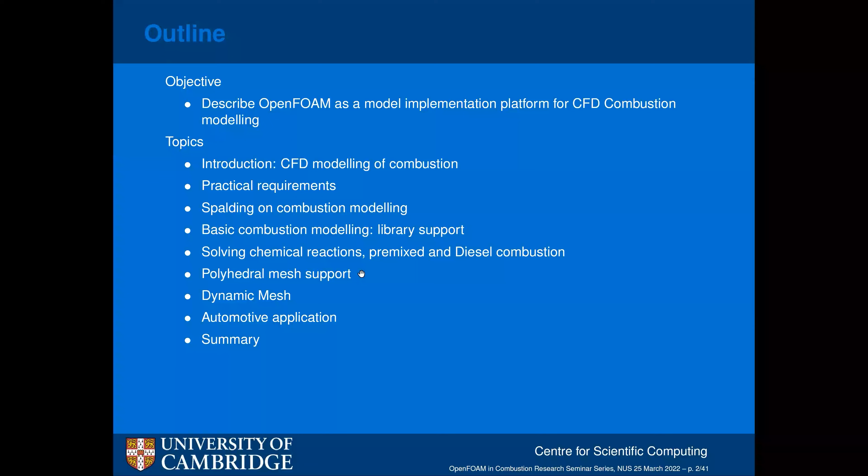We are solving continuum modeling equations. We are solving for concentration, conservation of mass, momentum, energy, and various additional phenomena. Going through this story, we will come about two-thirds of the way down, which again brings us back to the beginning, okay? But I'll keep that twist for a couple of minutes and dive straight into the story.

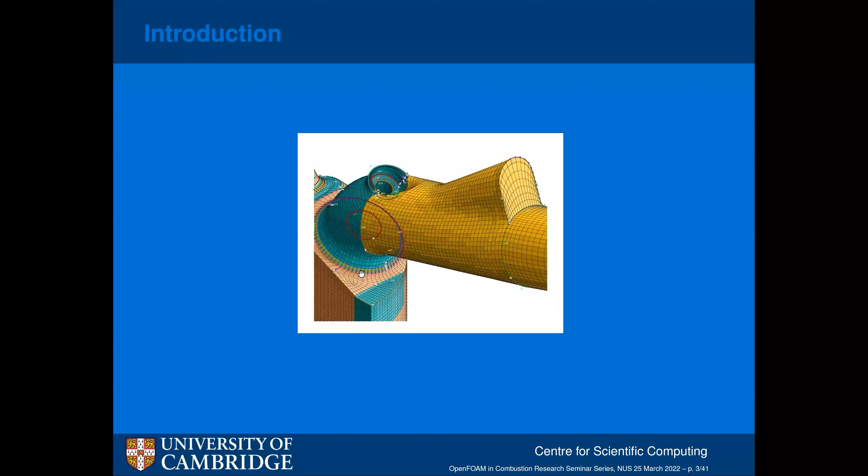So not many of you will recognize one of these geometries. This is actually a Daimler-Benz M111 engine from about 1990, where a lot of initial work on in-cylinder CFD has been done. Here is a bunch of pictures, and you will see the logo with C and D, which represents Computational Dynamics Limited. Now that code has evolved into STAR-CCM+.

And we were actually able to produce the results for cold flow and indeed combusting flow within an internal combustion engine. So here you can see why I keep saying that this is really cool, because you're going to have complex geometries.

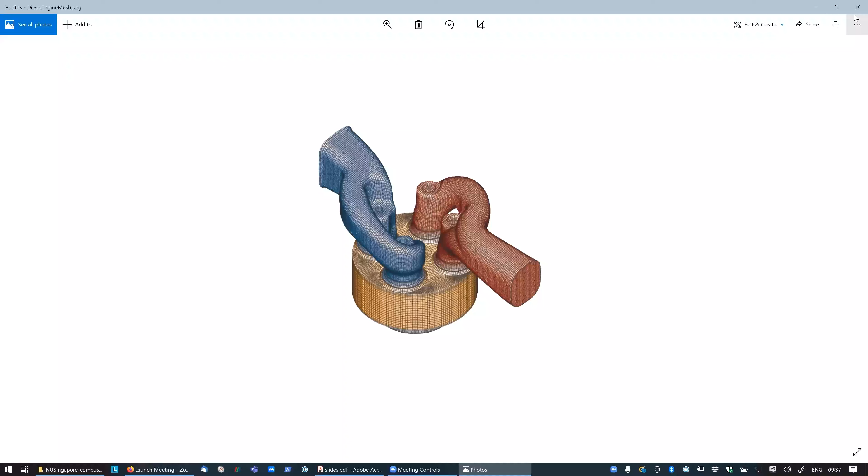On top left, let me see if this will click - we are going to have a diesel engine with sets of intake and exhaust stroke with quite a complex geometry in order to create swirl. The one in the middle will be a gasoline engine, again with quite a complex geometry. This part here is the location of the injector.

And on top of all that, you have to deal with the fact that within the simulation, the valves are opening and closing, the piston is moving up and down, and there is really quite a lot of physics to be done. Now, combustion modeling challenges have changed considerably over the last 30 years.

And although this looks really pretty, actually we had it easy. This was the very beginning of optical access internal combustion engine, doing LIF images of flames, doing measurements of flow structure within the internal combustion engine. And in fact, we knew really little.

So the kind of simulations that we could do was a piston going up and down, taking the mass that has been sucked into the cylinder and calculating the maximum pressure with and without combustion. Now, when one thinks about it, I can do these simulations on a piece of paper. And yet I was running pretty sophisticated pieces of code, and people would complain if we would miss the maximum pressure in the system by more than a couple of percent.

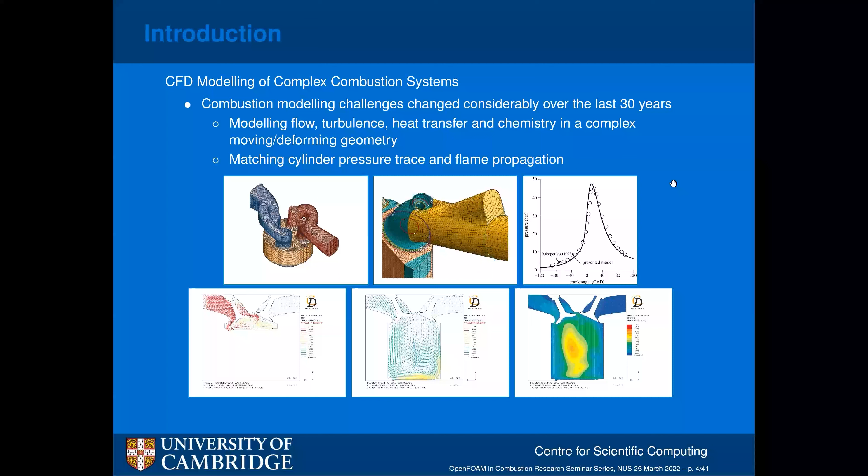What I want to do now is for each of those simulations, on significantly finer meshes, I need to perform a detailed parametric study and optimization, which means instead of one simulation that is useful in a certain way, I need to be able to do hundreds of them. This is a new quality because the pure quantity of simulations that we need to do is so much larger.

So in fact, the user requirement and the knowledge that we have about the problem move the CFD modeling of complex combustion systems onto a new plane.

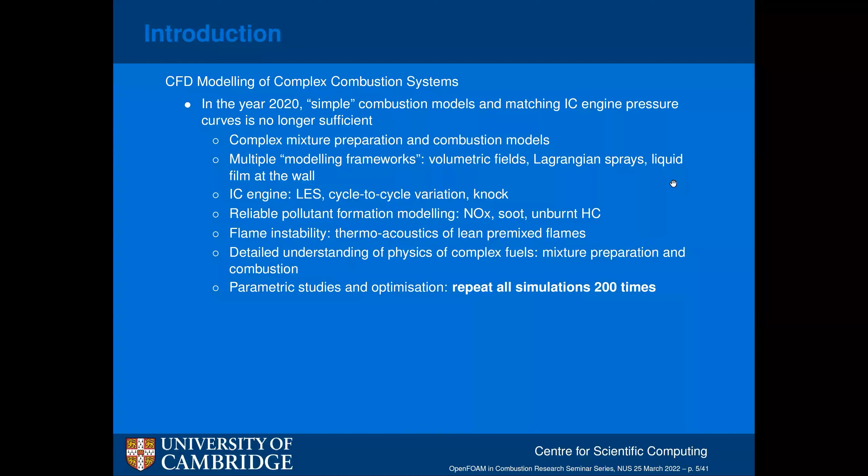So how does OpenFOAM come into that game?

During my professional work, I've spent about 12 years working with commercial CFD vendors, both at STAR-CD and at Fluent, which was later swallowed up by ANSYS. Going in, I had a certain set of beliefs, or illusions, about how the system works. These are very rich companies, and they employ very successful and knowledgeable people.

However, they are not quite as good as I would like them to be. The first thing is that they still write software, and it is not an order of magnitude better in quality than software written by other people. If you don't trust me, think about Microsoft Windows from the late 1990s, early 2000s, where the operating system spent half of its time crashing and was riddled by viruses, in spite of Microsoft probably being the richest company in the world at the time. So having a lot of money doesn't make you write better software.

What makes you write better software is caring about the things that you do. The second aspect where I was somewhat disappointed was the research and development effort these people were putting in. It turns out that the proprietary part of CFD methodology held by those solvers we cannot see in source code isn't that great. They don't invent better turbulence models, better discretization practices, or better equation-to-equation coupling and keep them to themselves. Indeed, the complete CFD methodology they use is already in the public domain.

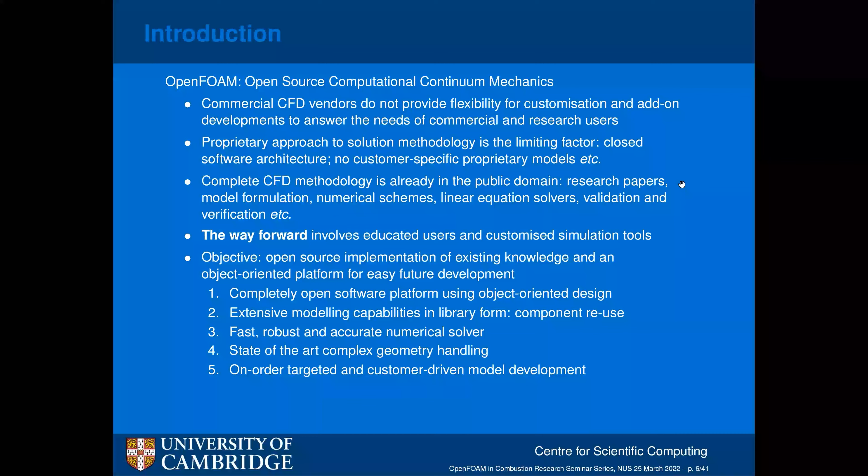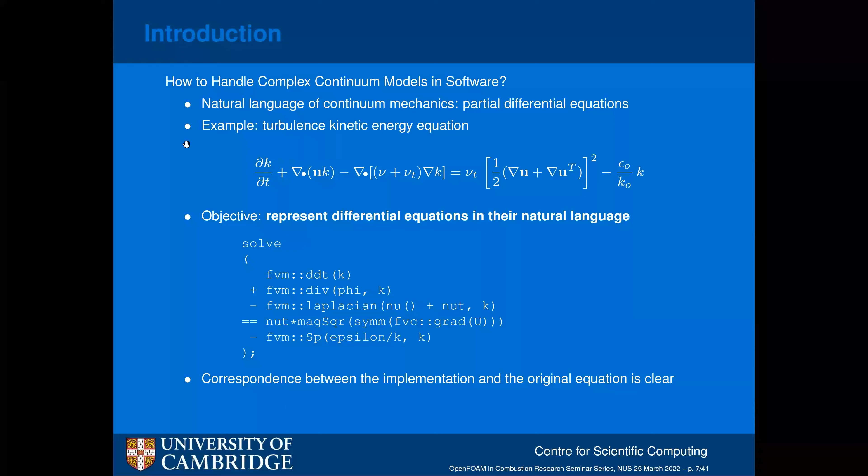Now, there is a further problem that we need to discuss. If you look at the way that the system is set up in my partial differential equations, if I have multiple equations sitting next to each other, the language that I am representing here is not quite complete. I would like to be able to deal with the solution of k and epsilon within the system of partial differential equations, where k and epsilon depend on each other. But based on the kind of things that I showed you so far, it is not immediately clear how to do that. So that leads me to the topic of the segregated solution algorithm.

Equation segregation is a really old idea. It comes out of the 1970s. And the principle at the time was that the computer power, memory, and CPU speed was so limited that I could barely solve equations one at a time. Therefore, we had to invent things like SIMPLE and PISO in order to couple the pressure and the velocity. The turbulence equations would be segregated from the system. The combustion equations could expand the system. So whatever we did was basically to solve multiple equations one at a time, and then handle inter-equation coupling via an outside loop, which basically means keep repeating the same time step, updating the properties until they stop changing.

Is this a good way of coupling? Well, not necessarily. It depends whether the transport is more dominant than the cross-coupling through the source terms. And if it is, then you're fine. But if it isn't, it might not work at all. The thing is that it is very flexible, and it allows us to expand the system of partial differential equations.

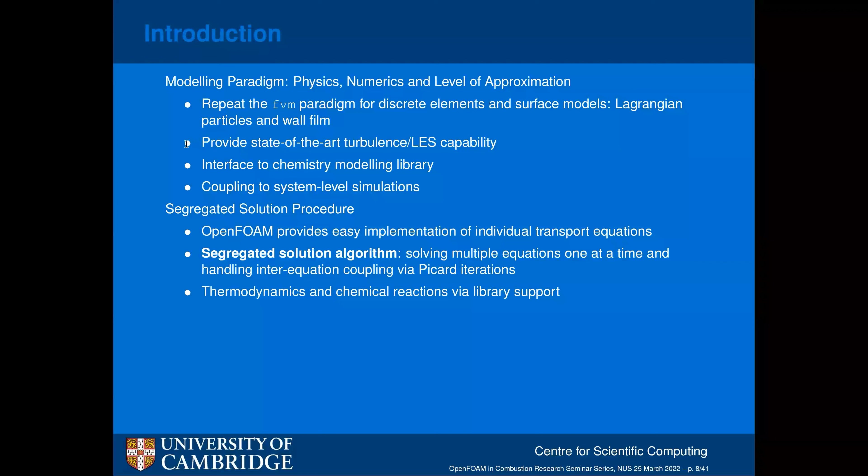For example, to the transport of multiple species within the chemical reaction mechanism, or adding radiation models, turbulence models, conjugate heat transfer models, etc., and just performing outside iteration from the system. So within the framework of OpenFOAM, you can really assemble very large, complex, nonlinear, coupled models of partial differential equations, wherever they come from, and solve them successfully. Sometimes it is not going to work, like, for example, in nuclear reactor neutronics, but that is beyond what we are talking about today.

Okay, so let us imagine it is the year 2022, and you have access to the code that can do combustion modeling. What are your practical requirements in terms of doing combustion simulation? Well, life is much more complicated than it was in 1990s.

The first thing I already mentioned, which is the complex geometry support. Within the mesh, you should have the ability to capture the real geometry. And just the very next step, dynamic mesh support, meaning that in an internal combustion engine, the piston will move up and down, the valves will open and close, you will have various parts of the system working with each other. And in the end, you will very quickly require adaptive mesh refinement. This is basically to allocate your computational resource in the best possible way.

The second thing that you need is the possibility of dealing with high performance computing. Well, this is a non-trivial problem in its own right. But for example, Professor Ng in our audience has access to a computer with 200,000 cores, and he most definitely wants and needs to use the whole of it. So if your software is not capable of being scaled up to exaflop performance, it really isn't good enough.

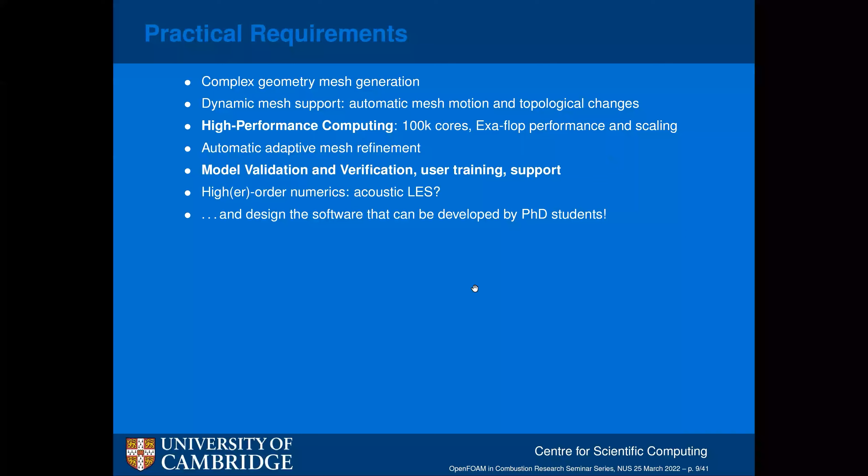So let's go back in history. Okay, so here I pulled out a book called 50 Years of CFD in Engineering Sciences, which is a commemorative volume published in memory of Brian Spalding. It is possible that you haven't heard of him, in which case I need to ask you to do your Google search and do your reading, because Brian Spalding is one of legendary professors, and he is the founder of the thermofluid section at Imperial College London. And basically, most of the stuff that I know from CFD was either done by Brian Spalding first, or he was involved in it in some ways.

I will start with a loose quotation because I cannot find the actual real quotation. And this is what he said in terms of combustion modeling: we have to overcome the artistic aspects of modern combustion modeling. This is circa 1960, and study the problem from principal aspects of conservation of mass, momentum, species, and energy. Okay, so what this says is your combustion modeling is not an art, it is a science. For those who would like to know more, below on the screen, you have the link to the book, which was written by some of his students, notably Norberto Fueyo. I think he was his last student at Imperial College. And unfortunately, Brian retired before I joined, so I only got to meet him afterwards.

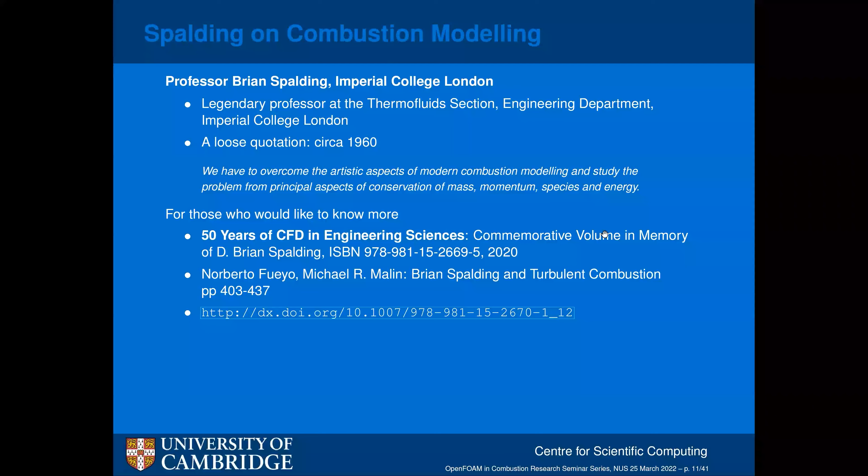So what did this guy do? Okay, 1951, PhD thesis, University of Cambridge. First numerical simulations, 1954. Fundamentals of combustions, CFD calculation of recirculating flows, 1968. Numerical prediction of laminar flame propagation, the eddy breakup model, which is criticized over the last 20 years in a million different ways. But take a look at the year, 1971. I will not go through the rest of the list, just point you to the last item, 1995 multi-fluid models of combustion.

Okay, so as you can see, from 51 to 95, he was either leading or driving forwards the combustion model. Why am I bringing him up here? The first reason is that the complexity of modern combustion modeling required his entire career. And the second reason is one saying that he had towards the end of his career, which says that within CFD, you can either have complex geometry or complex physical modeling. And you should not attempt the two together.

So if you have complex geometry, you better concentrate on doing external aerodynamics on the real shape of a Formula One car, because the fluid flow model is trivial. And if you're doing combustion, your physical model is so complicated that in reality, you should limit yourself to simple geometries. Well, guess what? We are trying to do the exact opposite. Complex physical model on complex dynamically moving geometries, which is quite a challenge no matter what framework you're working.

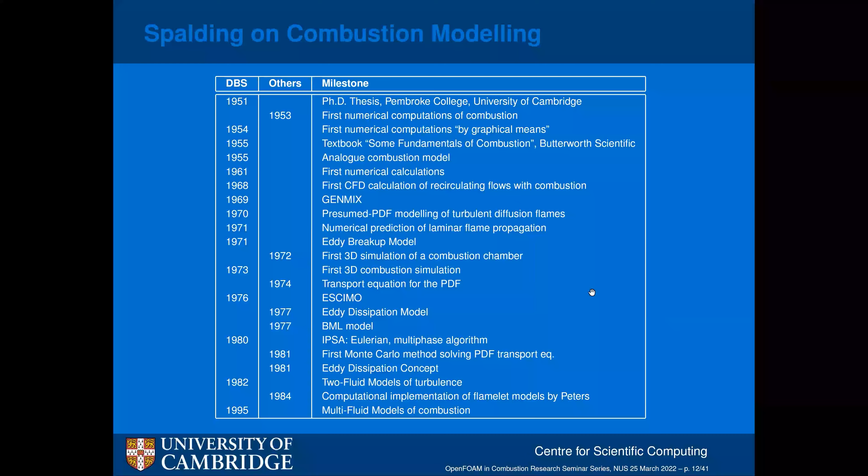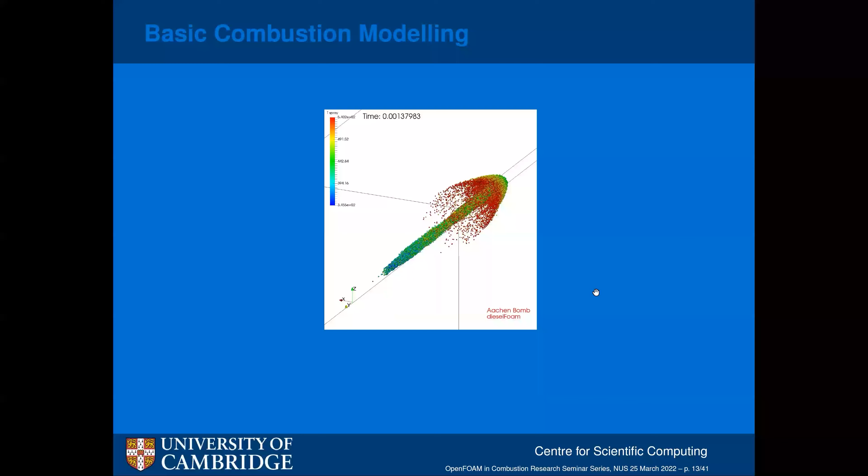Okay, so let's start talking about combustion modeling after this introduction. And as you have seen, my first picture is actually a diesel spray in a simple geometry according to Spalding. So in order to do this, it is no longer enough to have the capabilities of the finite volume method, discretization operators, mesh, and all the other bits. But we need to build up an intermediate layer of OpenFOAM as a computational continuum mechanics library. And the first one of them is the Thermodynamics Package.

So the job of the Thermodynamics Package is to associate the material properties of the medium as a function of state variables. In my case, that is typically pressure and temperature, but I'm sure Professor Fitzner, during his career, had different choices for different reasons. So even this first point of what are my state variables is not fixed.

The second problem that I have is that for each property, like laminar viscosity, I may have different levels of approximation with different levels of accuracy. So I can start doing my simulation with constant, I don't know, thermal conductivity or specific heat capacity. And as I'm getting towards doing comparison with experimental data, the effects of variable specific heat capacity may become important. So I need to be able to switch between them quite easily.

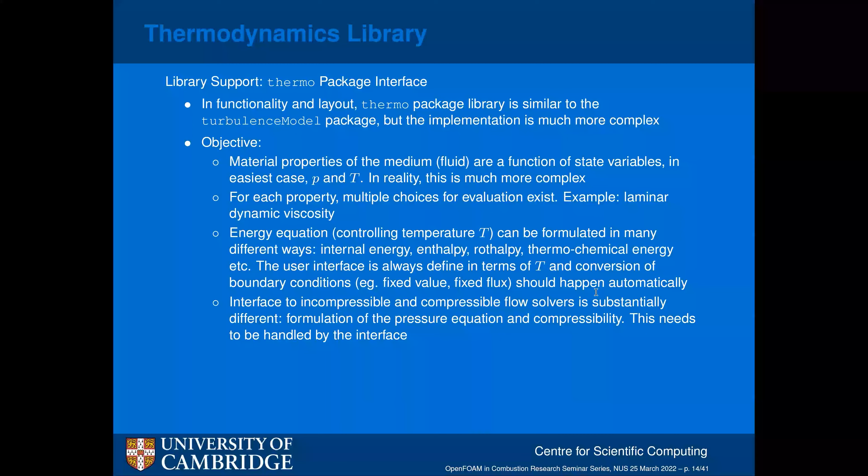So what my thermodynamics package does is it is responsible for the thermodynamic state of the mixture and evaluates material properties such as rho, Cp, Cv, and it will update those properties based on the state variable. Easy, right? Well, no, it isn't. Because while all of this is happening, I am also going to have chemical reactions changing the local composition of my material. So the interface is very deep, and doing the conversion, for example, between enthalpy and temperature, sometimes requires iterations.

And for all those who have attempted to do combustion simulation with OpenFOAM, I'm sure you're familiar with temperature getting out of range or T to H conversion failing. Well, typically this is not the fault of your thermodynamics package, but something else has gone wrong in the solver, but it is the thermodynamics package that does the screaming at you.

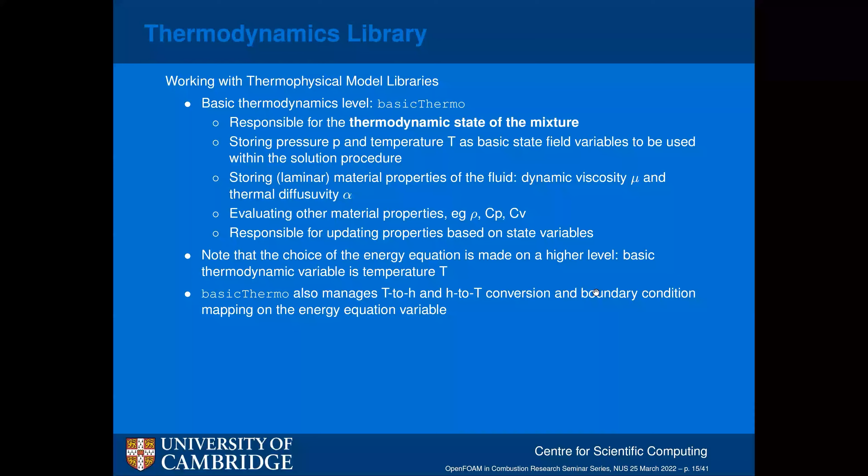So have a last look at what is all of the stuff that I need to have in my thermodynamics package. Starting from the bottom, I can have an equation of state. And to make things simple, I'll just say perfect gas. 5 seconds later, I will say, no, I want it incompressible with constant density, with variable density. I want a real gas, etc. So there is a whole bunch of choices.

The second level is the species composition of the material. The third are the thermodynamics properties of each of those species, plus the mixing rules for thermodynamics and for the transport properties. And then I'm going to start dealing with the mixtures, okay? And those mixtures can, again, be packed up in many different ways.

Did you notice something? It's getting hard to follow all this. And for this reason, this is the most hated and the most changed part of the code, because whatever you write is always a compromise between what can happen and what should happen, and something which is convenient for some people, but not convenient to the others.

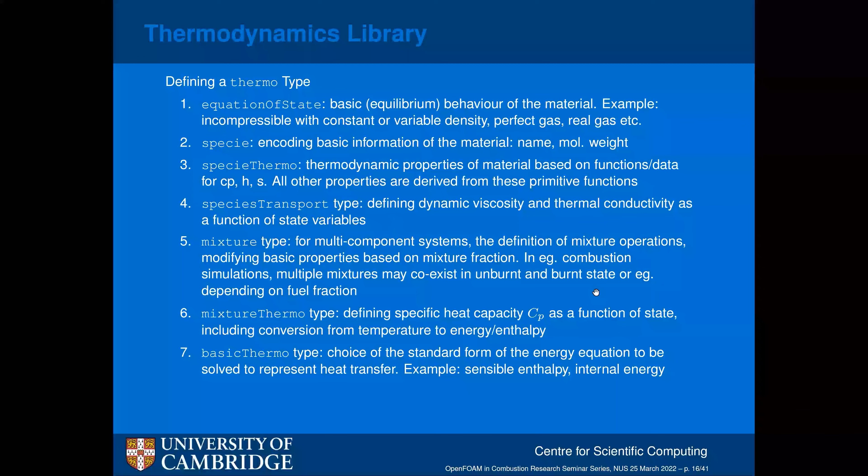Suddenly, the idea of working on discretization operators or high performance computing actually makes my heart smile, because the job of dealing with a thermodynamics library is so much harder. Things get even more complicated, and that is the support for chemical reactions. Okay, so in order to do combustion, we need to account for chemical reactions. And again, the choices of reactions are multiple, with each of them operating in a different way.

So here we are going to have transport equations for individual species. And then we are going to have the reaction rates saying what sinks and source terms are working within the system. So this part of the code looks good, and it will allow me to do the kinds of things with the mixture, and yet I'm still unhappy about it. The basic unhappiness on my side comes from the fact that the chemistry modeling package deals with temporally changing sources rather than long-term equilibrium. So everything's been designed to do transient simulations.

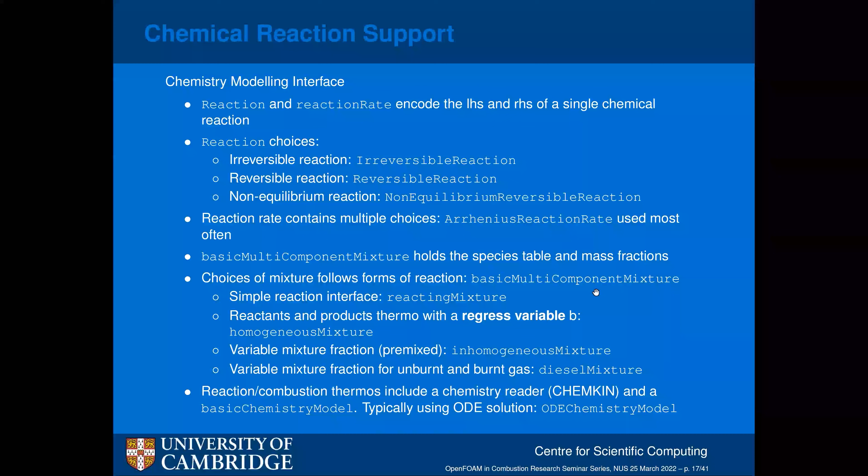And if I'm looking for steady state operation, then my thermodynamics chemical reaction support really doesn't do it for me yet. Okay, so this is a big to-do, but at least we know a clearly defined interface, because dealing with chemical reactions is about an order of magnitude easier than it is to deal with a thermodynamics library. Notice, there is a lot of code here. There is a lot of capability. The interfaces are complex, and it really only got me a few steps towards being able to do combustion. But it also saved me the need to keep re-implementing all of these interfaces to ordinary differential equation systems that solve for chemical reactions.

Right, so now I can solve volumetric equations of conservation of mass, momentum, and energy. I can solve transport equations for multiple species. I can deal with heat transfer. I can set boundary conditions. Let us assume that I am going to do complex geometry as well. Let's model combustion. The bad news is that there is no such thing as a universal combustion model. In fact, there is, but if you choose that one, you're never going to get to the proper performance and accuracy of results that you need.

All of the combustion modeling is basically to do with the chemistry, but the difference in the scales between the speed of chemical reactions and the speed of mixing influences the approach to the modeling that you use. So if I choose to do, I don't know, an internal combustion engine in a gasoline engine or a high pressure gas turbine, doing the chemistry will be truly problematic because the reaction zones are so thin that I can't afford to have enough mesh resolution in there.

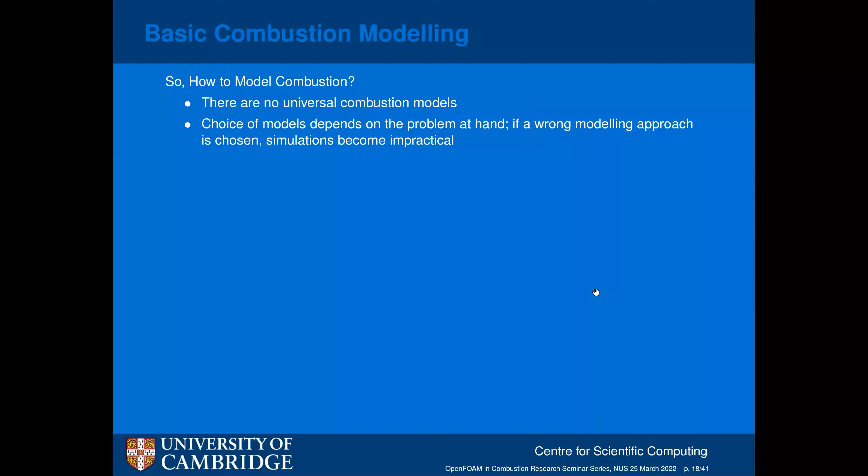So let's just jump into the details of how combustion is modeled. Now, here I have to say that I am not an expert, and there are people in the audience who know more about it. So I hope you will correct me in the questions and answers later. Conceptually, my first approach is, let's do a detailed chemistry solution. We are going to specify chemical species for gas composition, chemical reactions that take place, run the system, and we are going to get the answers.

The opposite of this is that in some phenomena, the speed of mixing is so slow compared to the speed of chemical reaction that I can assume that my flame is a thin surface in space. So this is called the Flamelet approach, where I'm going to separate my fluid into the burnt gas and the unburnt gas, and I'm going to represent the chemical reactions in terms of laminar and turbulent flame speed, and then run the chemical reaction set in this infinitely thin interface between burnt and unburnt.

Both of these are basically sets of volumetric equations, so I don't have to worry about too much. In diesel combustion, I have to take care of the fact that the fuel is being introduced in a liquid form. So in order to perform the combustion in the gaseous state, my liquid needs to be converted into gas via fuel evaporation and mixing, which basically controls the combustion.

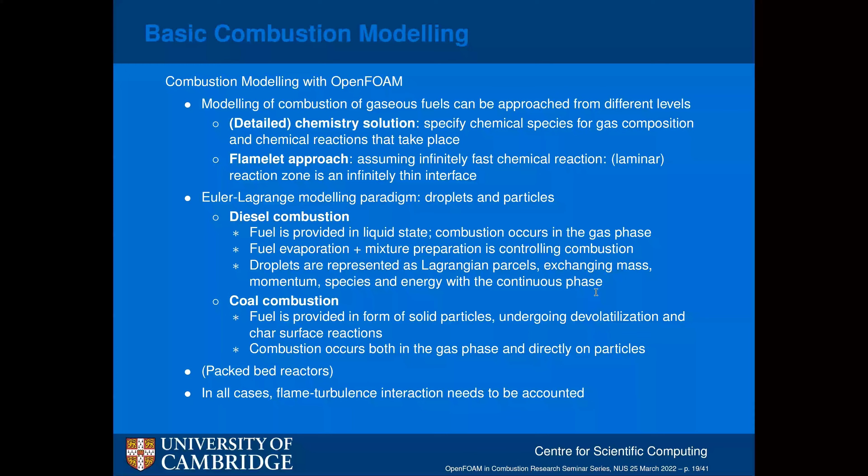I'm sure there are many other things that I should have said here, but for the purpose of this presentation, let us just consider that based on the choices that I have given, you will be able to pick up the modeling paradigm which is appropriate for the problem that you're solving. So let's take a look at them one at a time. All of these things need to be validated.

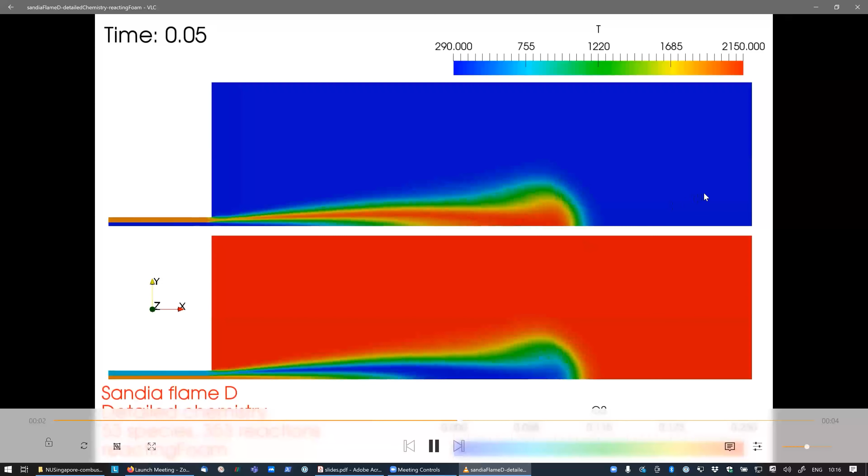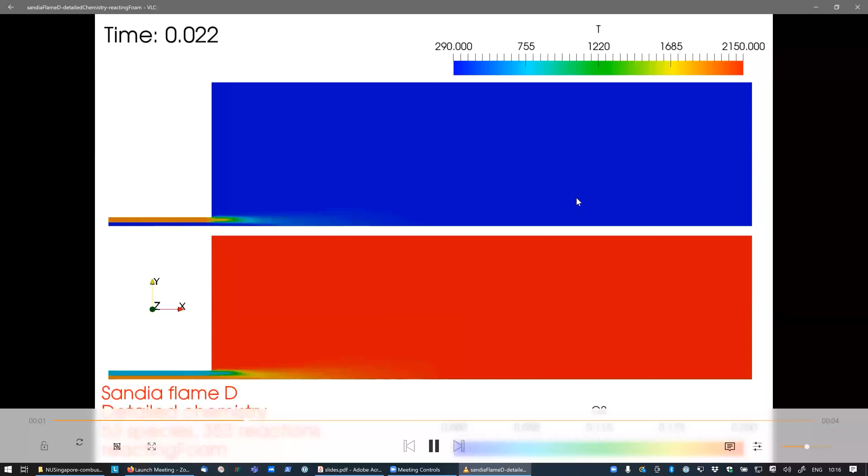Working with my colleague Dominic Christ, we have done extensive validation of Sandia Flame D, which is one of the test cases where the chemical reaction mechanisms and flame can be tested with excellent experimental results. So the picture that you can see here, maybe there is a movie as well. Okay, shows you the temperature and the oxygen concentration within the flame of Sandia Flame D.

The mechanism that we are using has got 53 species and 325 reactions. You remember what I told you about the segregated solution procedure? So now, apart from pressure, velocity, energy, turbulence, I have 53 additional transport equations. And the detailed mechanism consists of 325 reactions, which means that my ordinary differential equation solvers need to do a pretty good job. This is a lot.

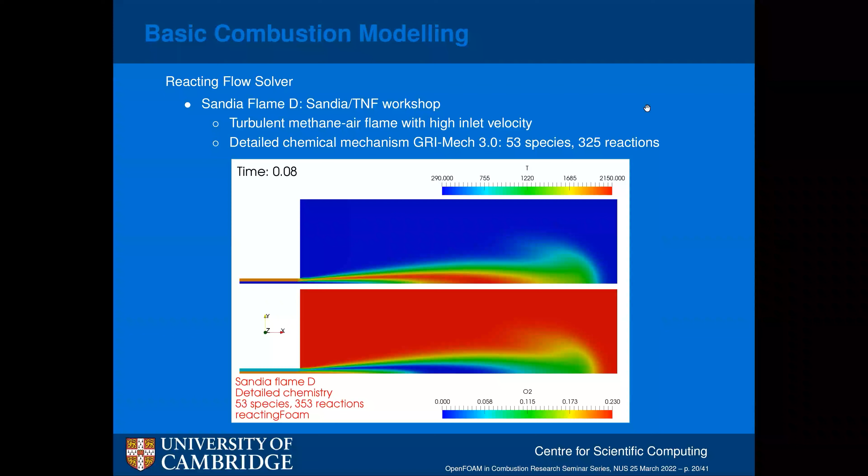At this level, the cost of the simulation is actually moved from the three-dimensional fluid flow into the ordinary differential equation solvers handling chemical reactions and evaluation of properties using, I don't know, JANAF lookup tables, which require complex polynomials. When stuff like this is used in an industrial environment, the turnaround time is critical. So dealing with this requires changes in the implementation on the ODE solver and material properties side in order to speed things up. There is, of course, another way of speeding things up, which is necessary if you try and do a more complex geometry.

So here I have a thermal power plant steam generator where we are modeling the similar aspects of combustion in a similar way. But instead of using the full GRI-Mech mechanism, we have two different approaches. The first one is the four-step chemistry, and then using the extended Zeldovich mechanism to calculate NOx, which was the point of doing the simulation, compared to detailed chemistry modeling with the GRI-Mech mechanism that I showed you on the previous slide.

So if you look at it, this is a very pretty simulation involving heat transfer and various other aspects that are built into the steam generator. But from the point of view of CFD, this is not too terrible. The results look pretty. I was surprised how accurate our NOx predictions were. And we found out that this is because our mesh was really fine. So this is a 7 million cell mesh, and it ran for about a week on 120 cores of a parallel computer. In contrast, the GRI-Mech mechanism was never properly completed because the CPU time is still quite large.

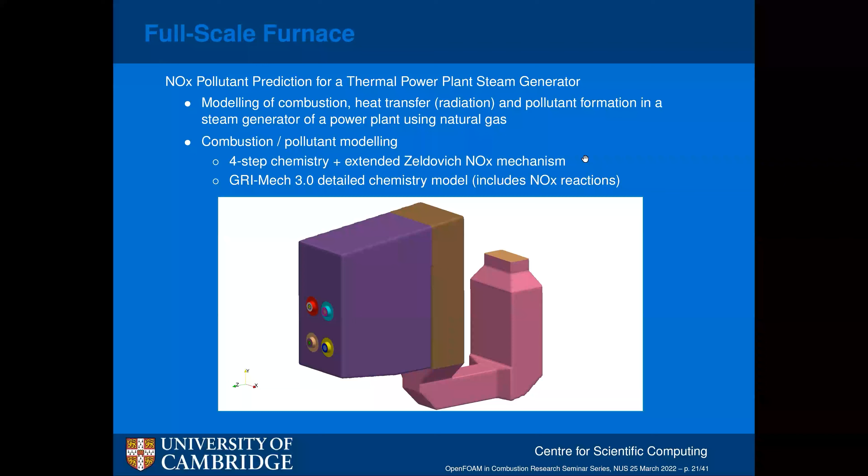Now, looking at the picture of this thing and thinking about the saying from Brian Spalding. Where are we? He said you can have complex physics in a simple geometry, or you can have simple physics in a complex geometry. And what we have here is a reasonably simple geometry with a reasonably complex physics, and things work well.

So let us move to the next set of examples. And here I only have one. Okay, so for the flamelet modeling approach, with premixed and partially premixed, we have done quite a lot of simulations. And I'm only showing you this one example. Again, there may be a movie.

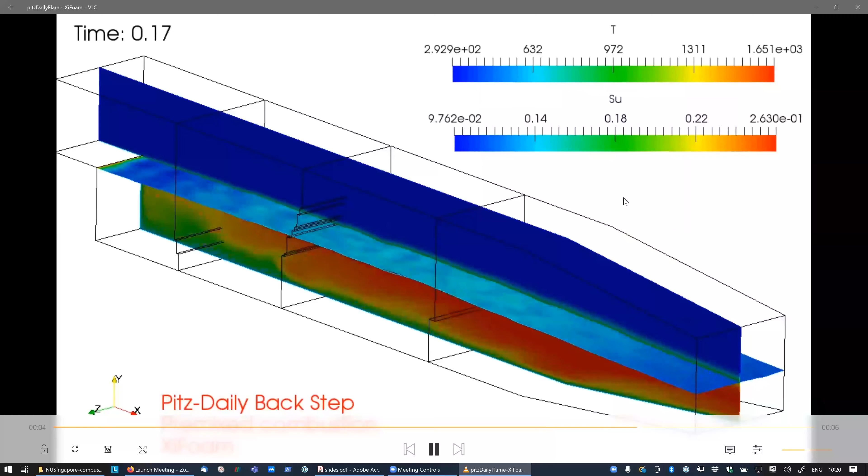Because the point of running a case like this is that we are no longer interested just in looking at the steady state, like we did in the previous simulation. In this case, with the backward-facing step, there is going to be an interaction between the turbulent premixed flame and coherent structures in the flow, which will cause the flame to flap about. So suddenly, rather than looking at steady state, we need to take a look at the instability modes that we need to have within a regime like this.

And because the combustion model is relatively simpler than it was previously, this kind of simulation can be done reasonably today. Further, the difference between the cost of RANS simulations and LES simulations is not that large. You're not interested in the near wall behavior, so it can be wall-modeled LES. And in order to make your combustion model work well, you need to have a relatively fine mesh. So just by putting in a lot of cells and running a simple flamelet model within the framework of a larger simulation, we can answer a lot of requirements.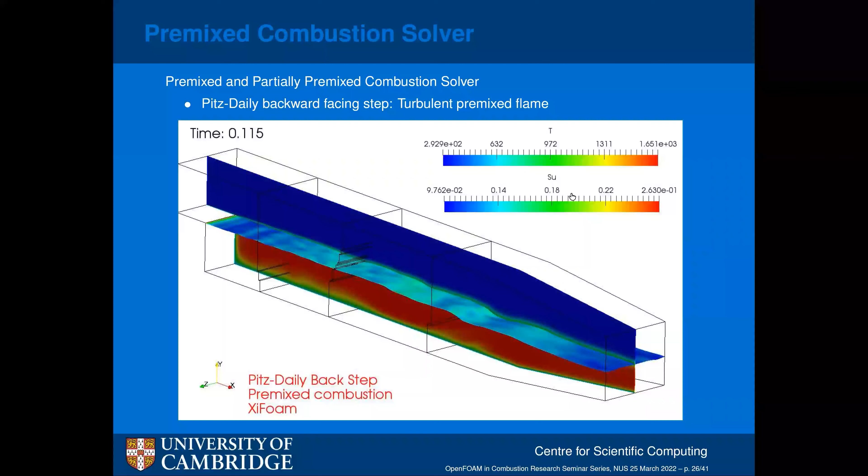I'm not showing you any more of these because later on we will have some examples of internal combustion engine modeling, and quite a lot of that uses the flamelet approach, so I'm going to save my time for later.

What about diesel combustion? Well, we have all of the things that we had before, but now the Lagrangian diesel spray model needs to come with a complete set of submodels. From the injection, we need to introduce Lagrangian parcels within the system, run primary atomization, turbulent dispersion, collision, drag, droplet evaporation, and heat transfer model, and then run some sort of combustion model in the volume. So the Lagrangian particle library written in OpenFOAM is available, and it's got the entire set of capability that I listed here. But I'm going to concentrate on this last item here, droplet wall interaction.

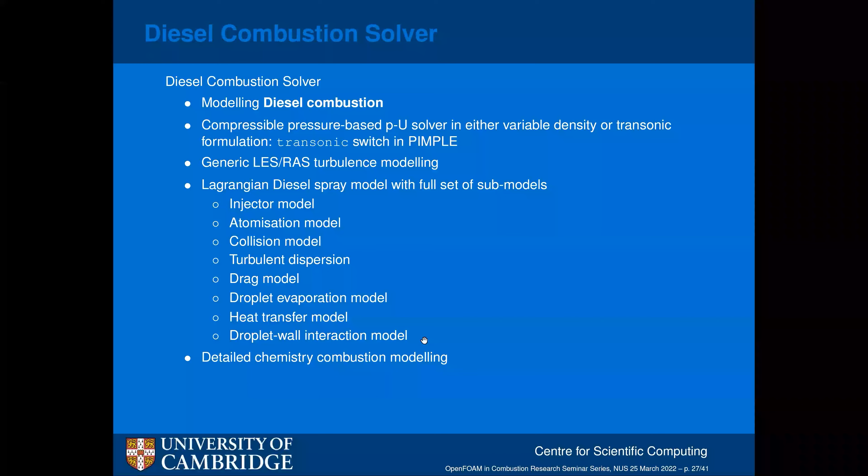Okay, so what we have here is another set of problems that come from the point of view of modeling where you have the interaction between the Lagrangian phase and the wall. We never had that one before. So let's just look at some pictures of what this looks like.

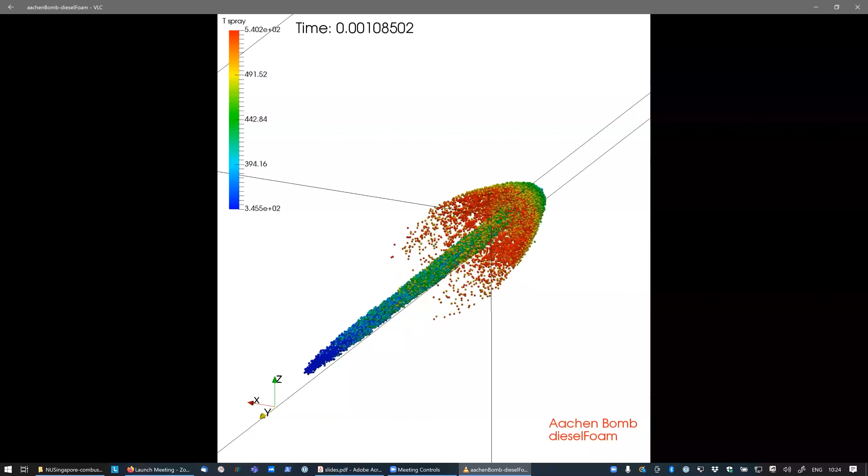Okay, so again, with some luck, there is a brief video showing the injection of particles. As you can see, the drag between the continuous phase and the discrete particles will form the shape of the jet. The particles are colored with their temperature, and as the temperature increases, they will start evaporating, and after a while, they're going to start burning in the volume as they go through the system.

Okay, so here again, we are within the framework of what Brian Spalding was talking about, which is more complex physics now. In fact, quite demanding complex physics, but my geometry was simple.

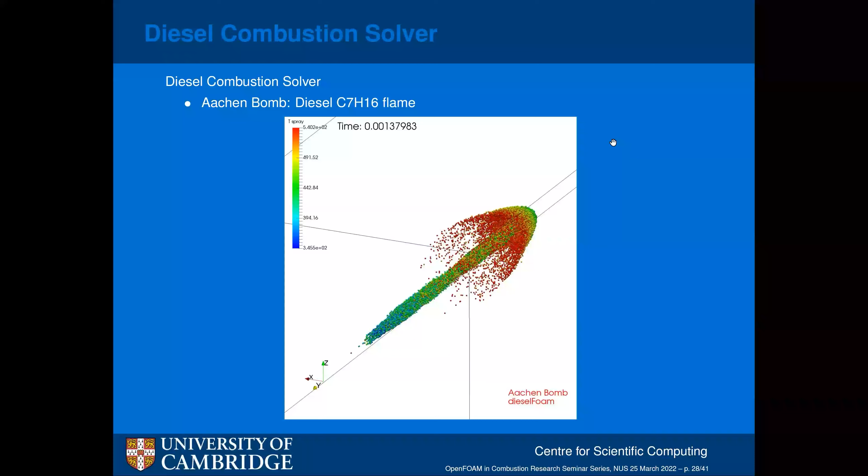You can take this further by looking at different kinds of Lagrangian particles, for example, in coal combustion. So the set of pictures I've put here will show the same layout, but for coal combustion. And this one has been applied to a blast furnace, which is a very different environment from the one that I started from. But because all of the aspects of the modeling are still here, it is possible to do this simulation to a relatively good standard.

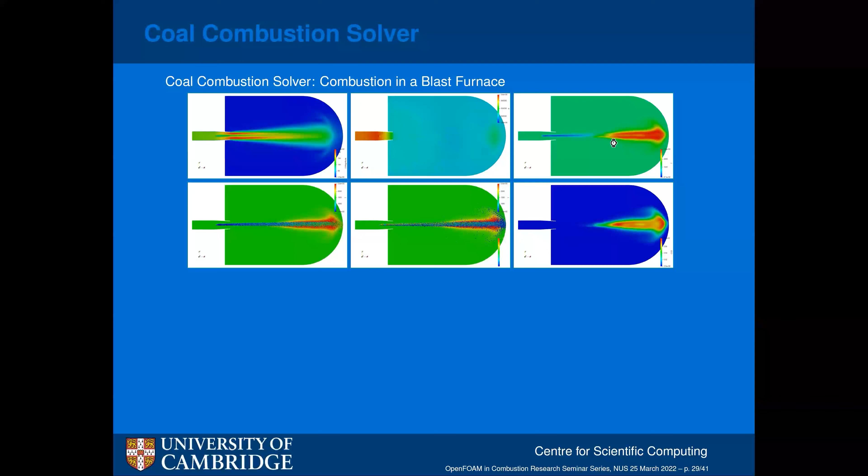Right. So far, I didn't bring you even close to the pictures that I showed you on the early slides, showing you internal combustion engines, where the piston and cylinder and the valves would be moving up and down, and you would be able to do all kinds of phenomena related to dynamically changing geometry.

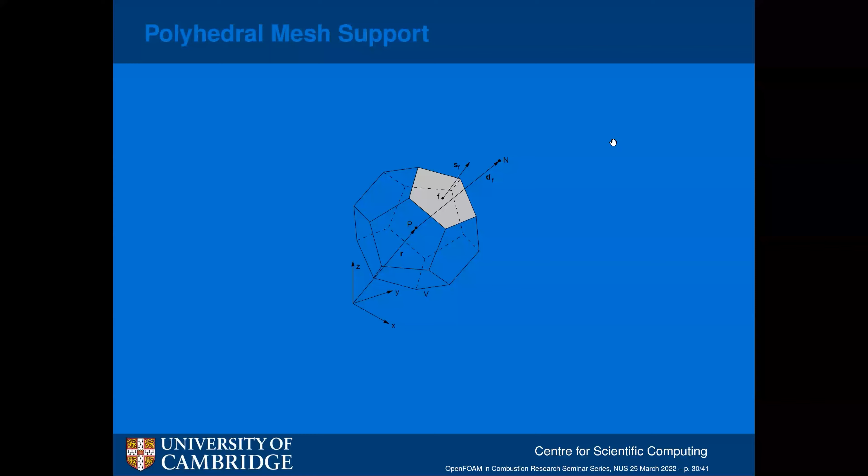So let us just say a few words about how the polyhedral mesh support and dynamic mesh allow you to marry complex geometry with complex physical models.

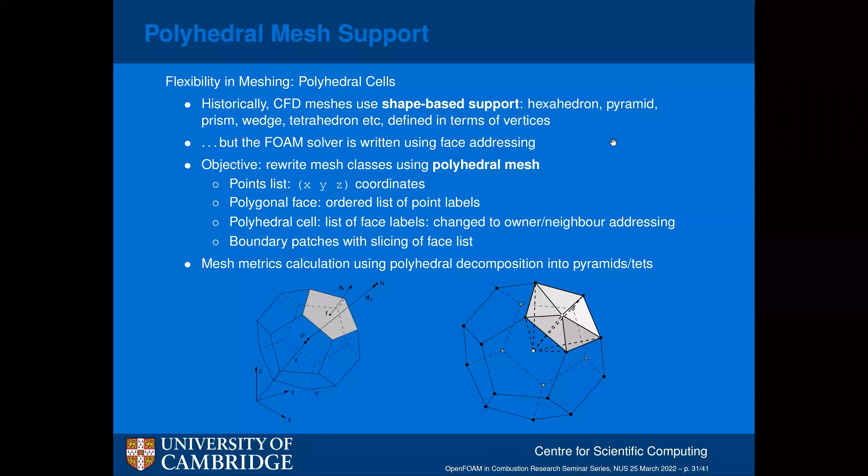So historically, CFD meshes were using a shape-based support. And one of the big things done in OpenFOAM was to use a polyhedral mesh support class. One can recognize that the principle of the finite volume method is that we are writing conservation equations over a piece of space, limited by a set of flat faces. Nowhere in the formulation does it say that your control volume needs to be a hexahedron or a tetrahedron. Now, hexahedrons are good, but the problem of mesh generation is just as hard as the problem of doing complex physics modeling. And the idea of polyhedral mesh support is that we are going to boil down the finite volume method to its very basics and provide ultimate freedom in the way that you generate the mesh.

So the mesh generation today still hurts. Building meshes for large complex geometries will take hours, sometimes days. But changing the rationale of the way that the mesh is being built has got some consequences. The first one is that all algorithms need to be fully unstructured. Okay, so that means discretization of convection, diffusion, source terms, sink terms, boundary conditions.

Any problems there? Well, no, that has been solved in the late 1990s and early 2000s. But how about radiation?

Well, if you're doing ray tracing, that may be a bit tricky. If you're doing Lagrangian particle tracking, that may be even more tricky, especially if you cannot guarantee that all the cells are convex, and you cannot.

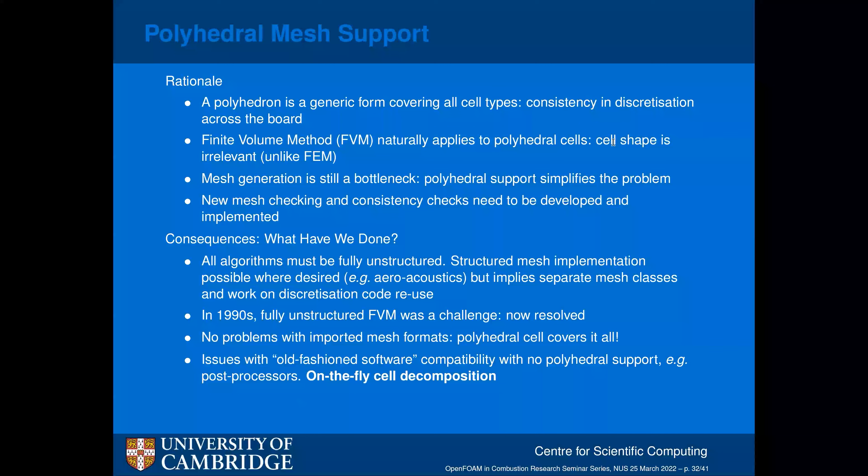So the consequences of polyhedral mesh support are really nice, but the more important aspect of polyhedral mesh support is to be able to deal with dynamic meshes. The idea of dynamic mesh is that the geometry of your mesh changes in time, and unlike the moving deforming mesh, this change in geometry cannot be described simply by moving the vertices of the mesh. A topological change is the change in the structure of the mesh where the number or connectivity of points, faces, and cells changes during the simulation.

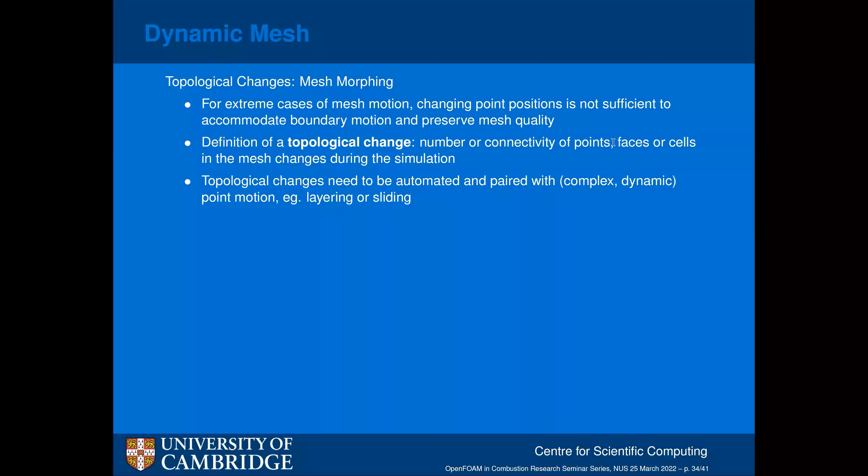I'll click on this with hope that the movie is going to work. Okay, it's a bit too fast. Let's try again.

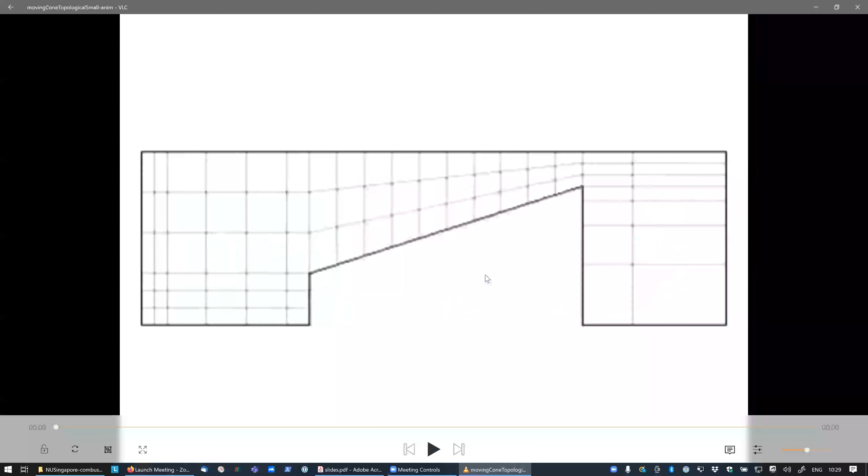So what you can see here is that as the mesh is deforming, the number of cells is changing within the system. Well, that's great.

It's also unusable, because if I want to define the changes in the mesh on the level of cell number 73 changing at time step number 525, this is completely unreasonable, especially under the constraints of high performance computing and parallel processing.

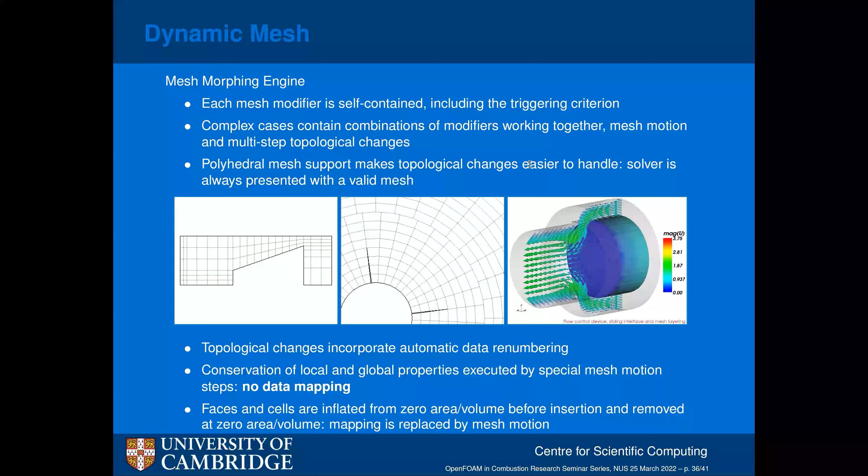So on top of my dynamic mesh, I need to introduce a set of ideas where the user can define the changes in the mesh by saying, this is an internal combustion engine, it has got a piston and a valve. As the piston is moving, the mesh structure needs to be changed accordingly.

One more philosophical point at this stage. On one side of my system, I am going to have the CFD solvers, solving, say, Flamelet type combustion sets of partial differential equations with the possibility of changing the mesh in space and time. On the other hand, I am going to have an internal combustion engine where the mesh structure changes because of the motion of valve and piston.

But also, I could run the same solver in a gas turbine and use adaptive mesh refinement to change the mesh. The point is that the mesh changes on one side and the solver that accepts those mesh changes are separate from each other. Because the interface between them is clearly defined, meaning, dear mesh, change yourself, I don't care how, and dear solver, the mesh has changed, this is how the data has been mapped, I can actually afford to do these kinds of things within the framework of the same software.

In CFD, one doesn't do the best of one's work on their own. Here I will use the opportunity to advertise one of the future talks by my friend, Professor Tommaso Lucchini from Politecnico di Milano. Here are some movies showing the kind of simulations that they can do.

So what you can see now is spray injection within the mesh with the piston moving at the same time.

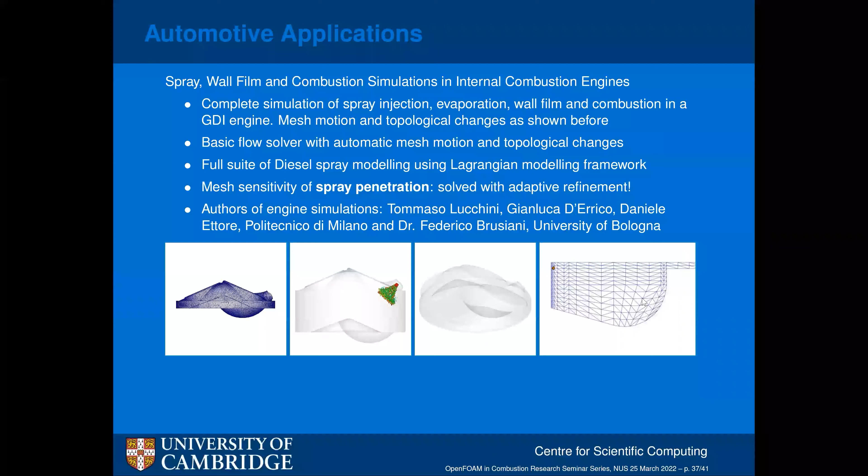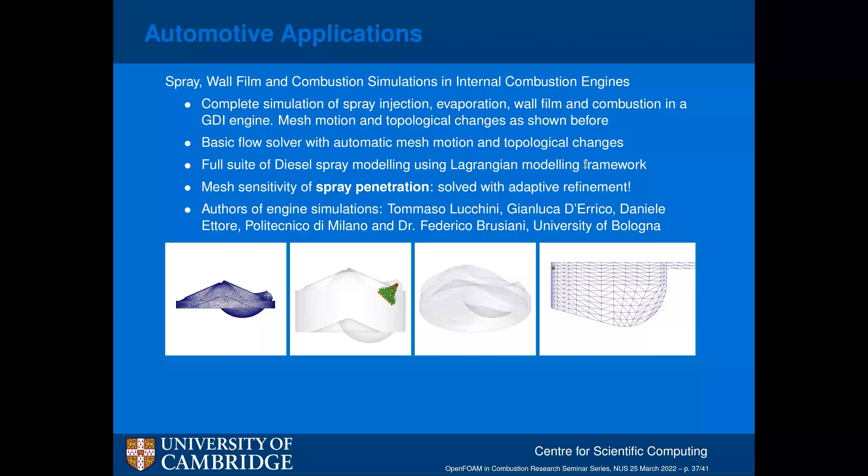I also promised you some adaptive mesh refinement. Here is one of the early simulations of Lagrangian spray using error-driven adaptive mesh refinement in the system. This is now maybe 10, 12 years old, but it shows how the combination of tools and the combination of effort within an open source environment brings excellent solutions.

You remember at one stage I spoke to you about spray-wall interaction. This was one of the CFD projects run in the group of Professor Gosman in the 1990s when I was there. Cheng-Xin Bai was looking at the phenomena of a droplet hitting a surface and then either sticking on the surface, evaporating slowly, flash boiling, bouncing, etc. In reality, there is one more degree of freedom that he didn't look at, and that is whether the surface is wet or dry at the beginning of this process.

So as an example of collaboration, talking again with our colleagues from Politecnico di Milano, we have introduced the idea of the finite area method, which solves for surface phenomena. Probably the most important of these surface phenomena will be a liquid film.

In this case, the spray hits the wall, it wets the surface, the shear can drive the film up and down, and the film is subject to heat transfer, which means that it can evaporate based on the state in the gas above it and on the metal underneath.

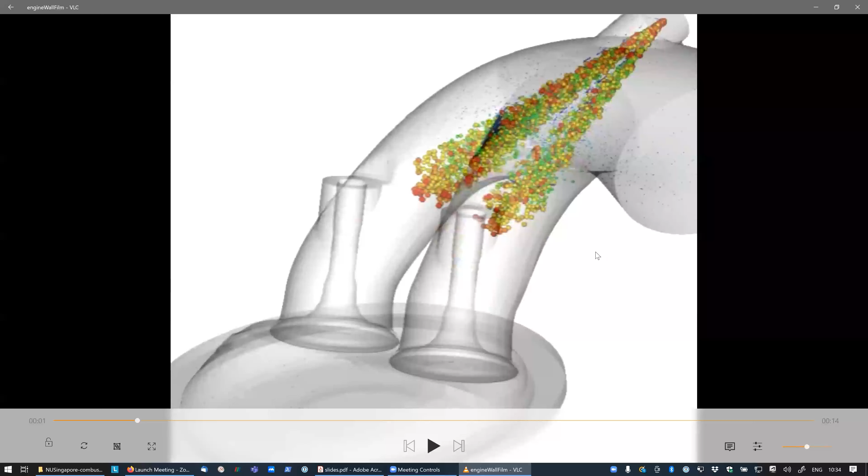So you have a gasoline engine with port injection and a large number of droplets aimed through the gaps in the valve. And what you can see here is how the wall gets wetted, okay? And later on, various other parts of the wall will be wetted as well.

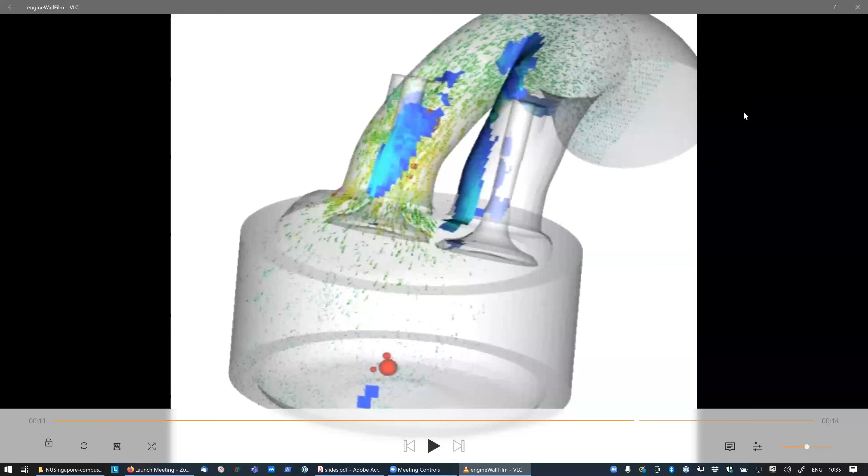The system of mixture preparation will now account for all the bits that we can capture within this volumetric Lagrangian particle, surface, and wall film framework. The reason I'm showing you this is, number one, because it is cool, and number two, because it illustrates how having a full set of numerical discretization support allows you to evolve and develop your physics model in order to capture the real physics that goes on in the flow.

And notice, physics is not nice. It will do what it thinks to do rather than things that are easy to model.

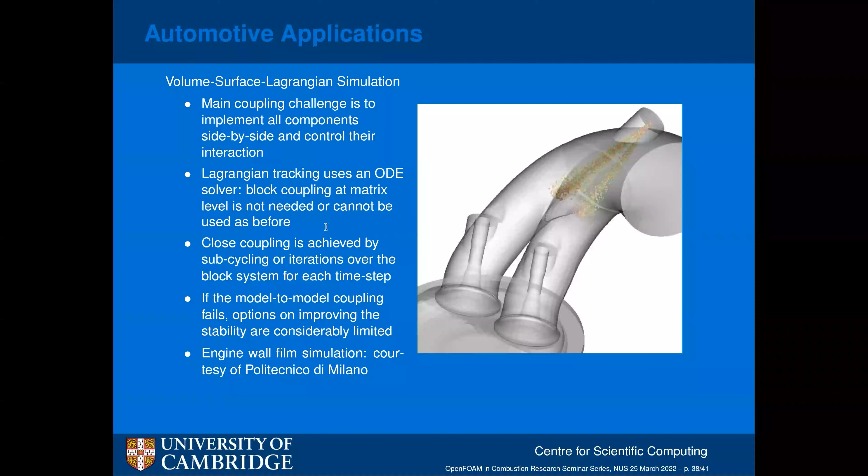Of course, within the concept of automotive applications and combustion modeling, Lagrangian spray, mixture preparation, there are a million more things we should talk about. For example, primary jet breakup, which was done in collaboration with Professor Im at KAUST, issues of diesel particulate filters, catalysts, and various other phenomena which extend the kind of things we have done. But now I'm really getting tired and we are past 1 hour.

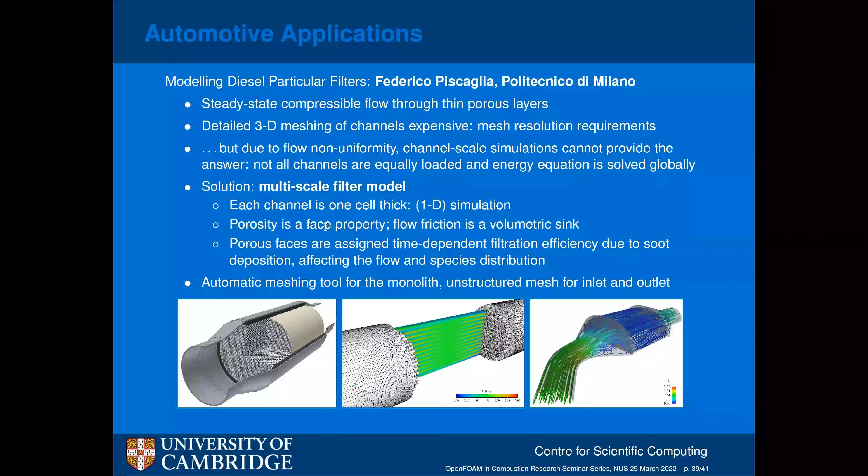So let's just finish this with a quick summary. The basic design decisions in OpenFOAM make it easy to implement loosely coupled sets of partial differential equations of the type seen in combustion modeling. The inter-equation coupling is typically handled using a segregated solution method, which makes it easy and simple to extend, but sometimes it can suffer from equation-to-equation coupling issues.

If you get to those problems, within OpenFOAM we have other ways to strongly couple region to region and equation to equation. That is something that we need to consider.

OpenFOAM is interesting for combustion modeling for three reasons. The first one is multiple discretization support: Lagrangian, finite area, finite volume, and conjugate coupled simulation between all of them.

The second one, the hard work of dealing with thermodynamics and chemical reaction packages has already been done, and I hope it is done in a way that makes it relatively easy for you to interface with.

And finally, the solver has got all the bits that you would expect from a modern CFD solver in the year 2020, like high performance computing, dynamic mesh support, adaptive mesh refinement, etc.